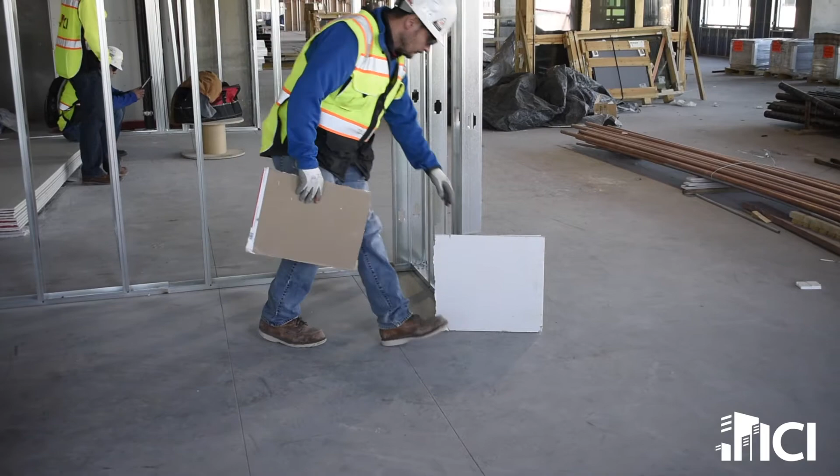Safe work practices and good housekeeping habits are responsibilities that we all share. The Occupational Safety and Health Act of 1970 requires companies to furnish all employees a workplace free from recognized hazards and in compliance with safety and health standards promulgated under the Act. Housekeeping on a construction project should be an ongoing process, not a one-time practice.

Location of first aid kits, which should be in all gang boxes on the job site. Safety data sheet, SDS location, should be in the general contractor's office. Location of the project safety program, manual, and site-specific safety plan in case of emergency should be in the superintendent's office. Report injuries, accidents, or near-miss incidents immediately to your supervisor or safety director.

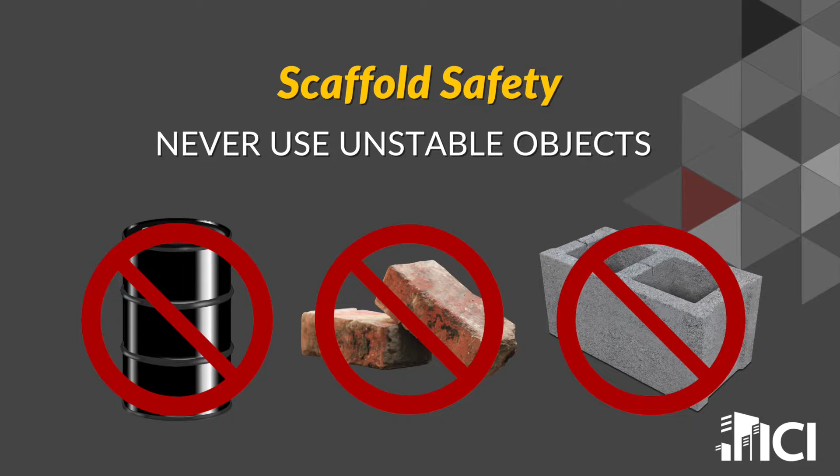Scaffold must be sound, rigid, and sufficient to carry its own weight, plus 4 times the maximum intended load without settling or displacement. It must be erected on solid footing. Unstable objects such as barrels, boxes, loose bricks, or concrete blocks must not be used to support scaffolds or planks. Scaffolds shall not be altered, moved, or dismantled in any way.

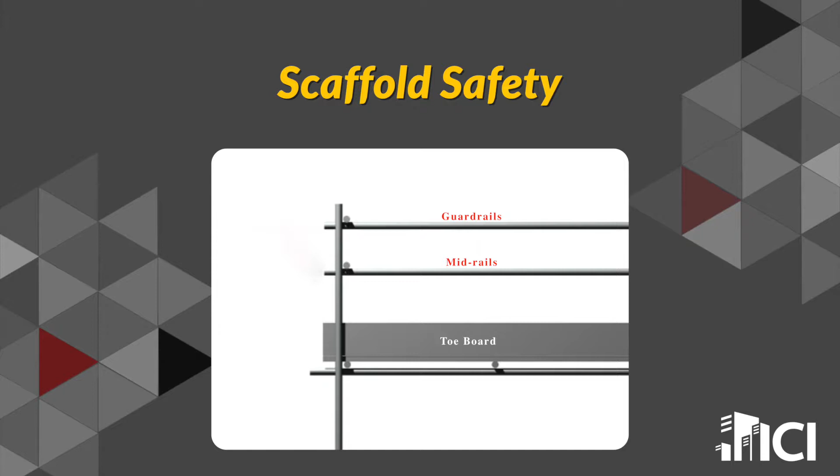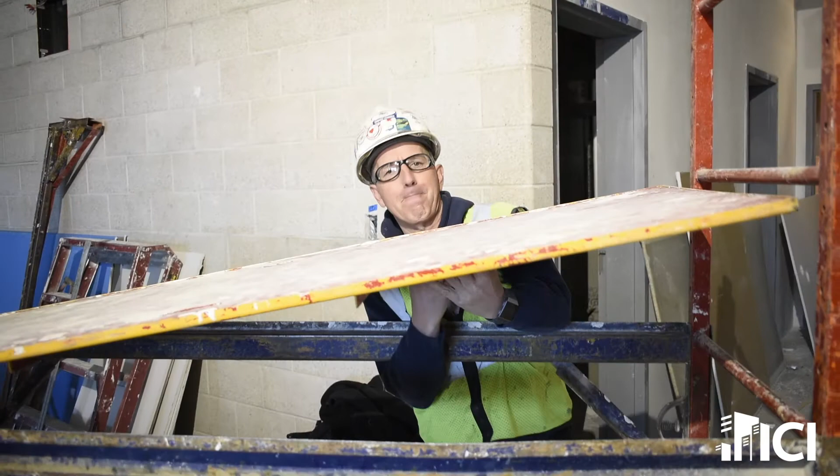Scaffolds must be equipped with guardrails, mid-rails, and toe boards. Any damaged braces, brackets, or screws must be replaced or repaired immediately. Platforms must be tightly planked with scaffold plank grade materials or equivalent. A competent person must inspect the scaffold before each shift. Rigging must be inspected. Scaffolds can be accessed by using ladders or stairwells.

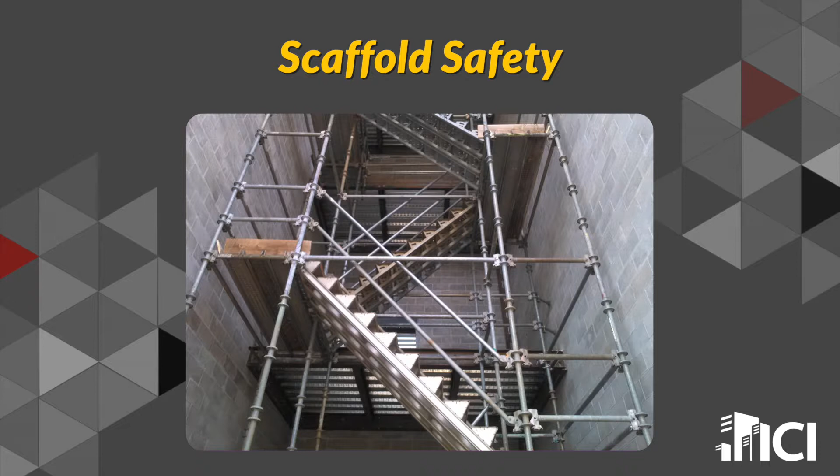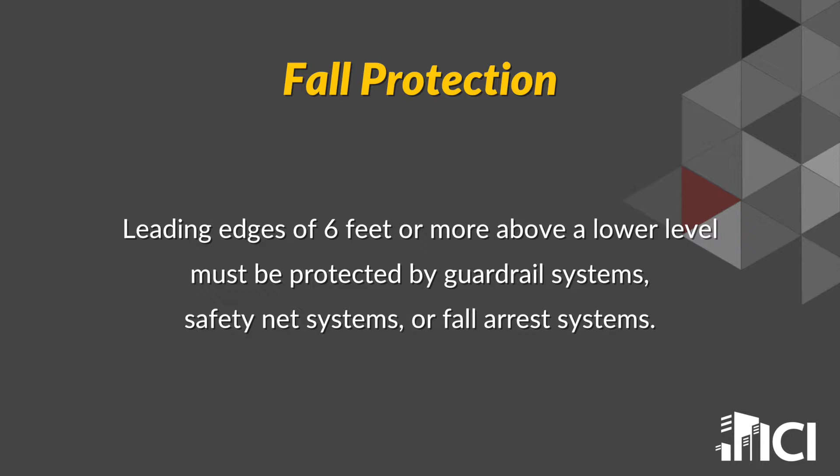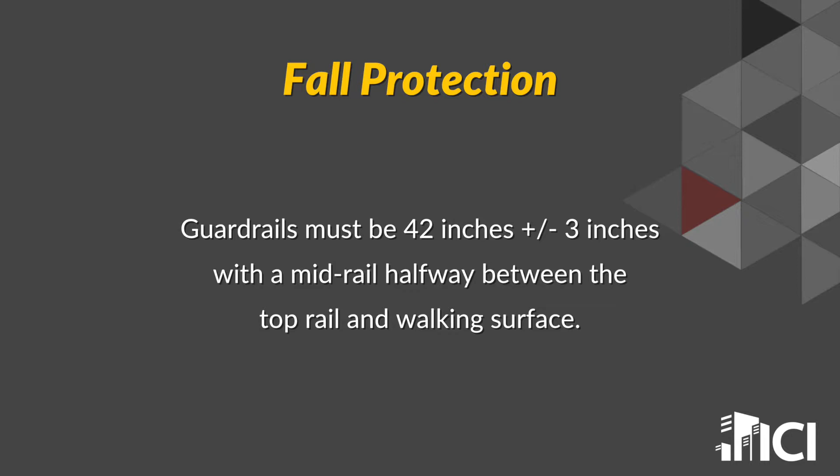Guard every floor hole where a worker can accidentally walk in. Guardrails and toe boards around every elevator, open-sided platform, floor, and runway. Leading edge 6 feet or more above lower level must be protected by guardrail systems, safety net systems, or fall arrest systems. Guardrails must be 42 inches plus or minus 3 inches with the mid-rail halfway between the top rail and walking surface. Working in a boom lift requires fall arrest systems.

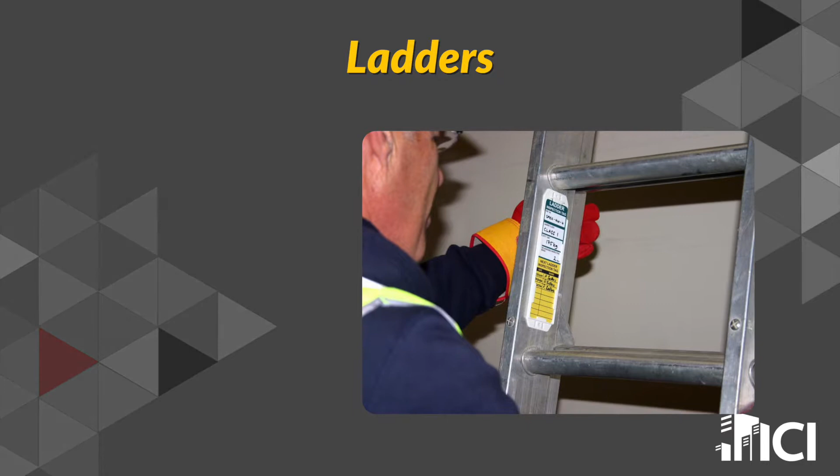Use the correct ladder for the task. Have a competent person visually inspect the ladder before use for any defects such as structural damage, split or bent side rails, broken or missing rungs, steps, cleats, and missing or damaged safety devices.

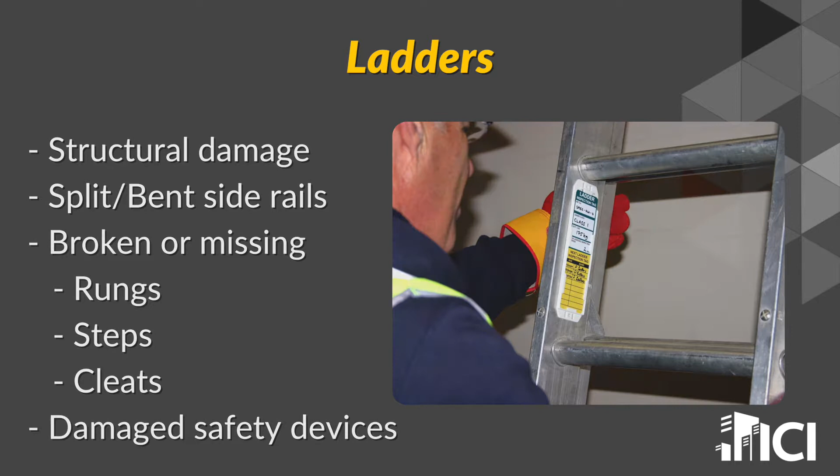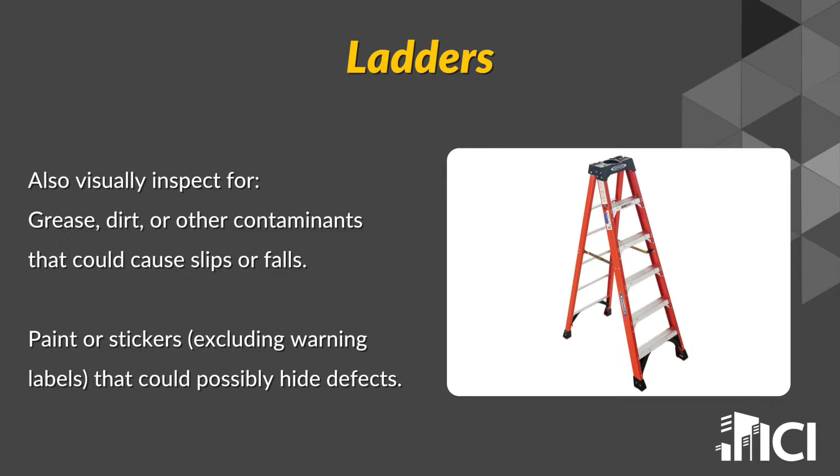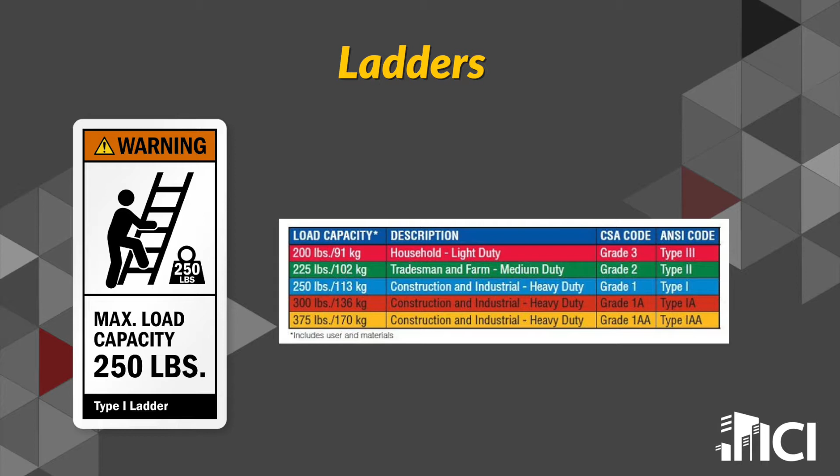Make sure that the ladders are long enough to safely reach the work area. Mark or tag damaged or defective ladders for repair or replacement, or destroy them immediately. Be sure that the rating can support the weight of the user, including materials and tools. Never load ladders beyond the maximum intended load or beyond the manufacturer's rated capacity. Avoid using ladders with metallic components near electrical work and overhead power lines.

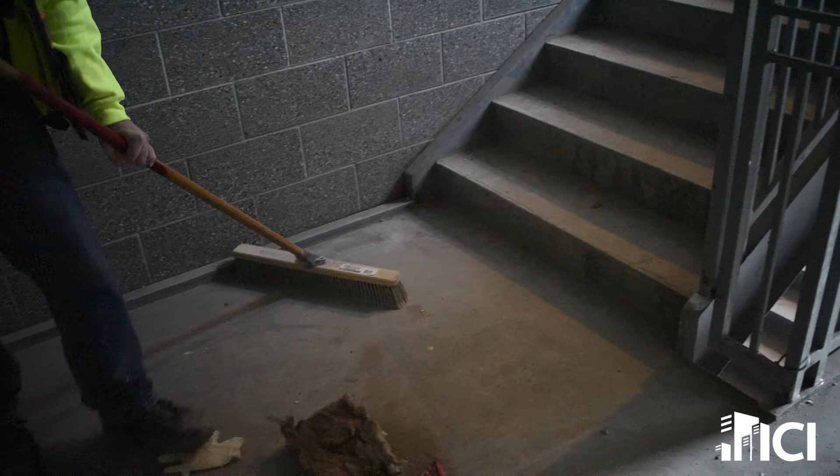Stairway treads and walkways must be free of dangerous objects, such as debris and materials. Slippery conditions on stairways and walkways must be corrected immediately. Make sure that treads cover the entire step and landing. Stairways having 4 or more risers or rising more than 30 inches must have at least 1 handrail. Stairways shall have proper lighting to prevent falls.

Only trained and authorized persons are allowed to operate aerial lifts.

Hazards include: fall from elevated levels, objects falling from lifts, tip-overs, ejections from the lift platform, structural failures or collapse, electric shock, entanglement hazards, contact with objects, and contact with ceiling and other overhead objects.

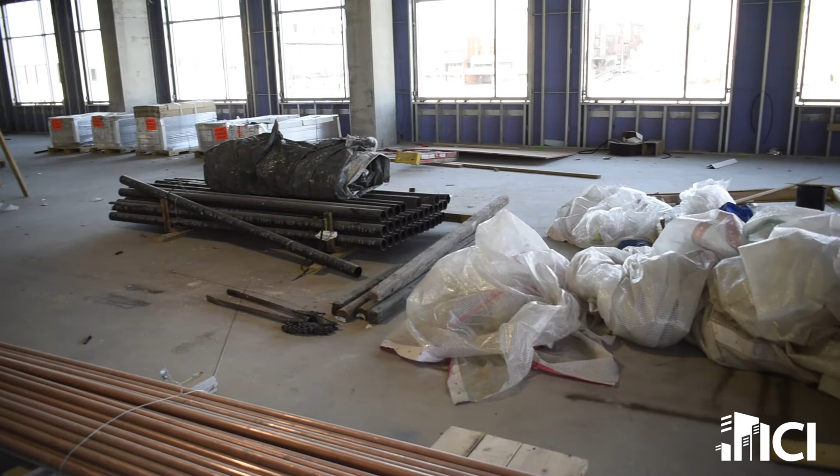Prior to each work shift, conduct an inspection to verify that the equipment and all its components are in safe operating condition. Employers must assure that work zones are inspected for hazards and take corrective actions to eliminate such hazards before and during operations of an aerial lift.

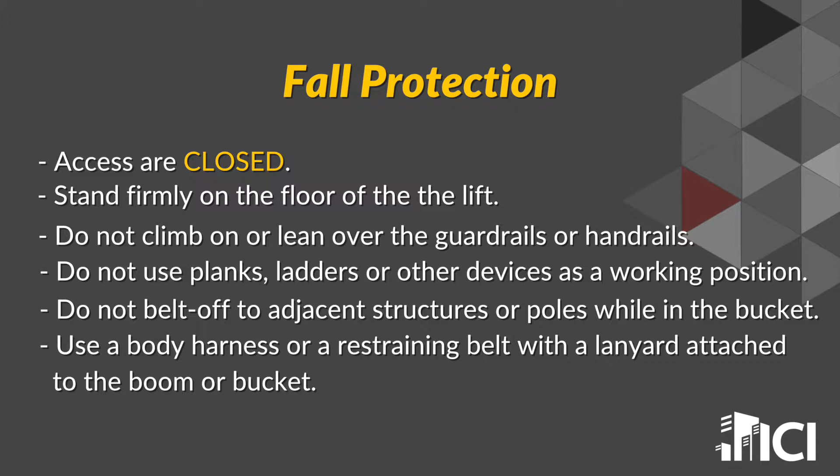Fall protection: access gates are closed. Stand firmly on the floor of the lift. Do not climb on or lean over guardrails or handrails. Do not use planks, ladders, or other devices as a working position. Do not belt off to adjacent structures or poles while in the bucket. Use a body harness or restraining belt with a lanyard attached to the boom or bucket.

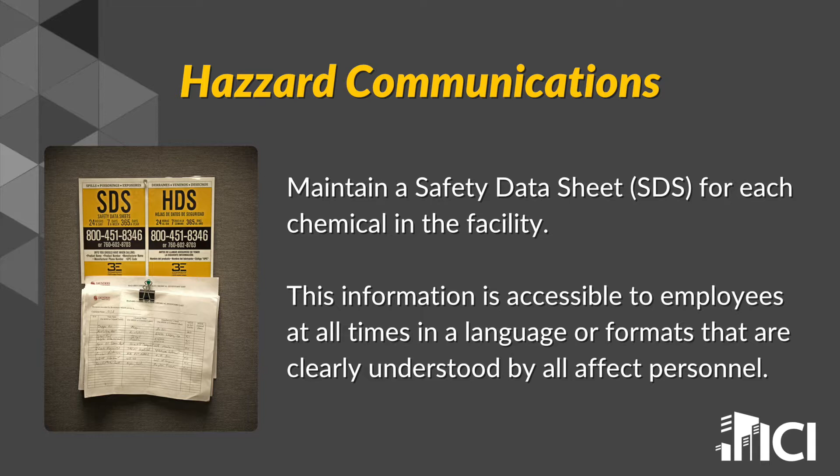Maintain a safety data sheet, an SDS, for each chemical in the facility. This information is accessible to employees at all times, in a language and format that is clearly understood by all affected personnel. Employees shall be trained on how to read and use the SDS.

Follow manufacturer's SDS instructions for handling hazardous chemicals. Employees shall be trained about the risk of each hazardous chemical being used. ICI shall provide spill cleanup kits in areas where chemicals are stored.

Have a written spill control plan. Employees shall be trained to clean up spills, protect themselves, and properly dispose of the used materials. Provide proper personal protective equipment and enforce its use. Store chemicals safely and securely.

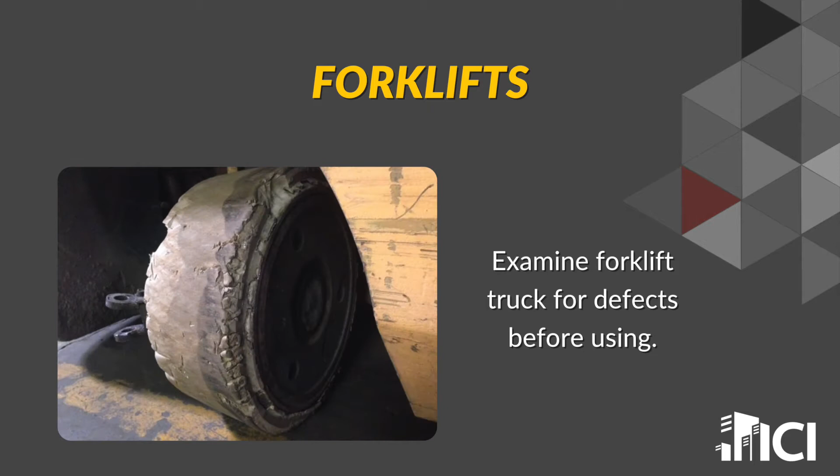Only trained and certified operators are approved to use forklifts. Do not allow any employee under 18 years old to operate a forklift. Properly maintain haulage equipment, including tires. Do not modify or make attachments that affect the capacity and safe operation of the forklift without written approval from the forklift's manufacturer. Examine the forklift truck for defects before using.

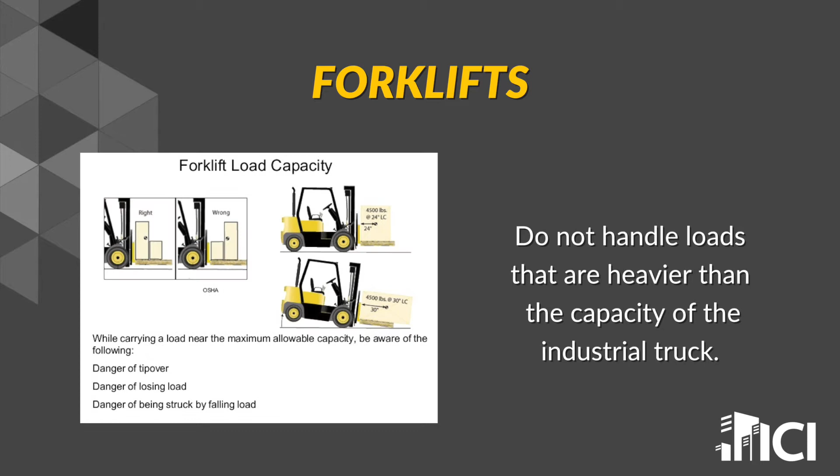Prohibit stunt driving and horseplay. Do not handle loads that are heavier than the capacity of the industrial truck. Remove unsafe or defective forklift trucks from service. Operators shall always wear seat belts.

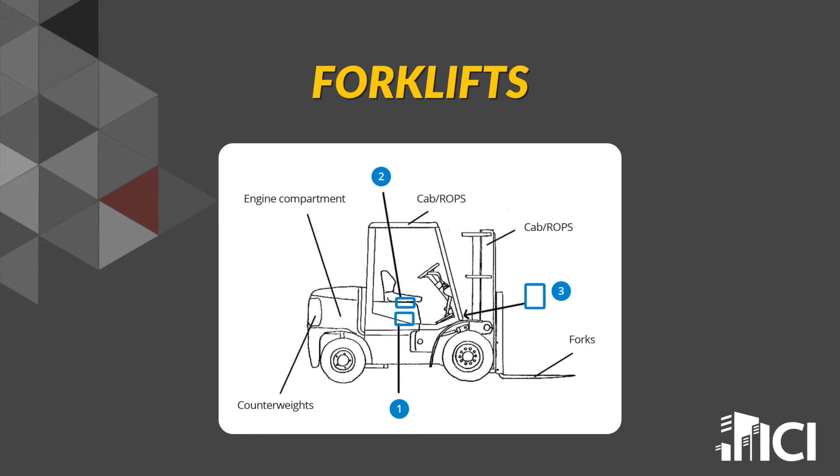Avoid traveling with elevated loads. Assure that the rollover protective structure, or ROPS, is in place. Make certain that the reverse signal alarm is operational and audible above the surrounding noise level.

Safety glasses or face shields should be worn anytime work operations can cause foreign objects to get into the eyes, such as during welding, cutting, grinding, nailing, or when working with concrete or harmful chemicals, or when exposed to flying particles. Eye and face protectors are selected based on anticipated hazards. Safety glasses or face shields are worn when exposed to electrical hazards, including energized electrical systems.

Construction workers should wear work shoes or boots with slip-resistant and puncture-resistant soles. Safety toe footwear is worn to prevent crushed toes when working around heavy equipment or falling objects.

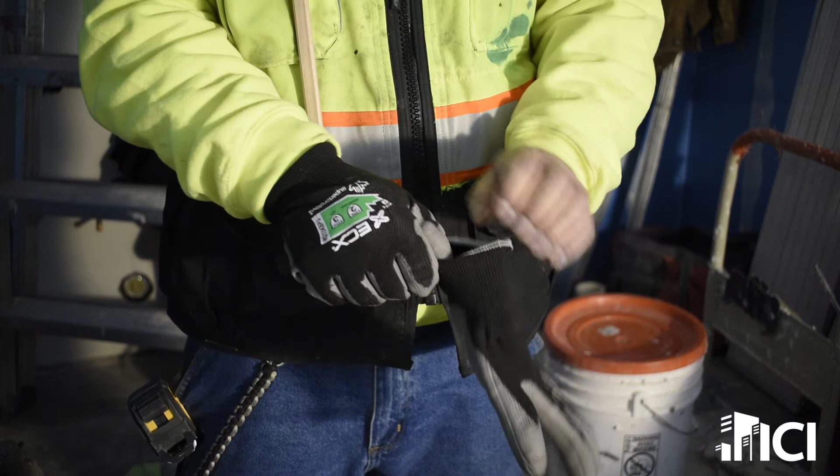Gloves should fit snugly. Workers wear the right gloves for the job, for example, heavy-duty rubber gloves for concrete work, welding gloves for welding, insulated gloves and sleeves when exposed to electrical hazards. Workers shall wear hard hats where there is a potential for objects falling from above, bumps to the head from fixed objects, or accidental head contact with electrical hazards.

Hard hats are routinely inspected for dents, cracks, or deterioration. Hard hats are replaced after a heavy blow or electrical shock. Hard hats are maintained in good condition. PPE is mandatory on all ICI projects with no exceptions.

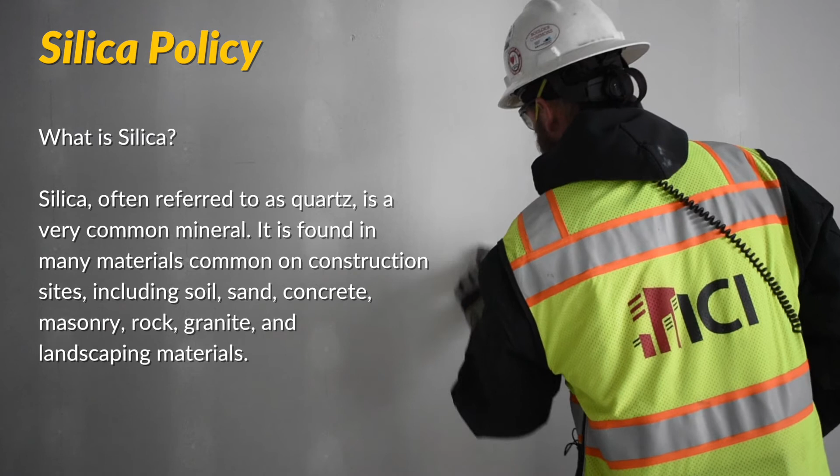What is silica? Silica, often referred to as quartz, is a very common mineral. It is found in many materials common on construction sites, including soil, sand, concrete, masonry, rock, granite, and landscaping materials. Why is silica hazardous? The dust created by cutting, grinding, drilling, or otherwise disturbing these materials can contain crystalline silica particles.

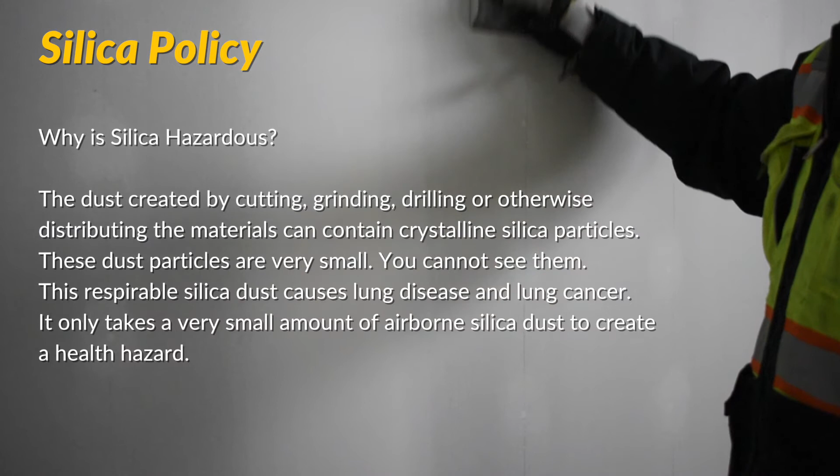These dust particles are very small. You cannot see them. The respirable silica dust causes lung disease and lung cancer. It only takes a very small amount of airborne silica dust to create a health hazard.

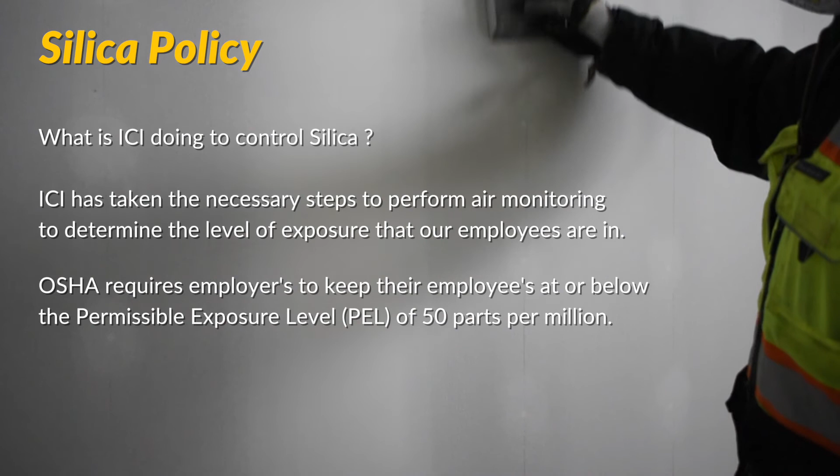What is ICI doing to control silica? ICI has taken the necessary steps to perform air monitoring to determine the level of exposure that employees are in. OSHA requires employers to keep their employees at or below the permissible exposure level of 50 parts per million.

Our current exposure level is 40. ICI is working on new ways to minimize the exposure even lower than our testing levels. With the help of every employee, that can and will be attainable.

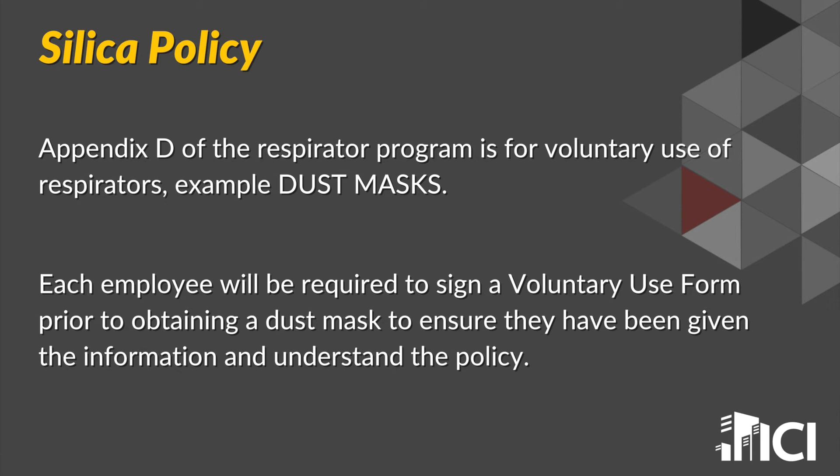Appendix D of the respirator program is for voluntary use of respirators, for example, dust masks. Each employee will be required to sign a voluntary use form prior to obtaining a dust mask to ensure that they have been given the information and understand the policy.

Considerations while working around silica include: wash hands and face before eating, drinking, and smoking. Wear a dust mask whenever finishing and sweeping operations. Vacuum drywall dust from clothes and floor whenever possible. Use dustless equipment if available.

Barricade working areas with tape and signs to inform third-party workers of the hazard being created. Never use an air hose to clean clothes or working surfaces, as the silica will become airborne again. Remember, you can help maintain and eliminate the exposure by following these steps. If you have questions, please see the safety department.